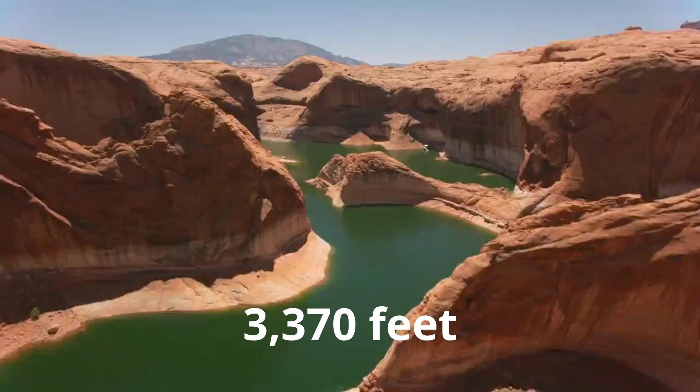3,370 feet. That is the exact elevation where Glen Canyon Dam simply stops working, not runs dry. Stops working. Below that line, called dead pool, water sits trapped because the outlet works can no longer release it by gravity. In April 2023, Lake Powell came within 30 feet of losing hydropower completely, the closest this dam has gotten to that failure since it filled in the 1960s.

Officials called it a drought crisis. I work in reservoir operations, and drought is the smaller part of this story. The real failure was poured into concrete in 1963. And here's a small detail that tells you how messy the record keeping around this dam actually is.

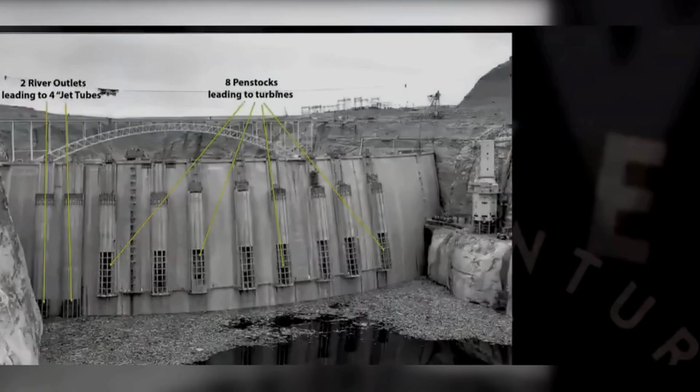The number everyone quotes for dead pool, 3,370 feet, matches the intake elevation of the river outlet works. But the United States Geological Survey ran its own elevation area capacity survey of the reservoir in 2018, and it places the equivalent dead storage bench slightly higher at 3,372.91 feet. That's not a huge gap. It's a couple of feet.

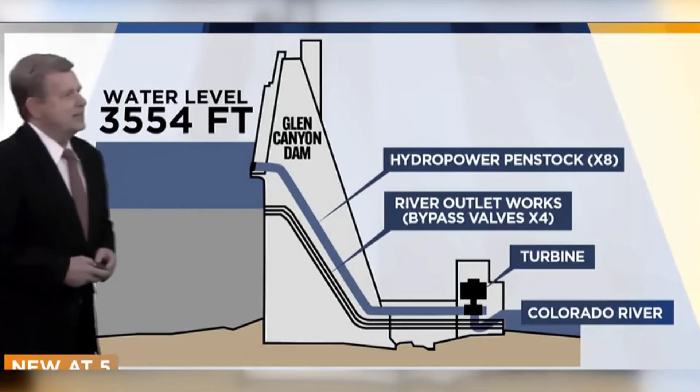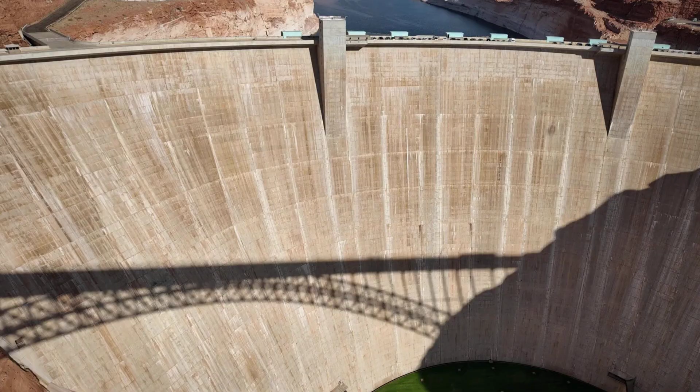But when your entire crisis narrative hangs on a single elevation number, and two federal data sources don't agree on it to the foot, that tells you something about how loosely this system has actually been tracked over the decades. Below either version of that line, the reservoir doesn't vanish. Roughly 2 million acre-feet of water would still sit there, stranded behind the dam, rising and falling only with inflow, evaporation, and seepage, completely unusable for downstream delivery or power. That's not an empty canyon. That's dead weight.

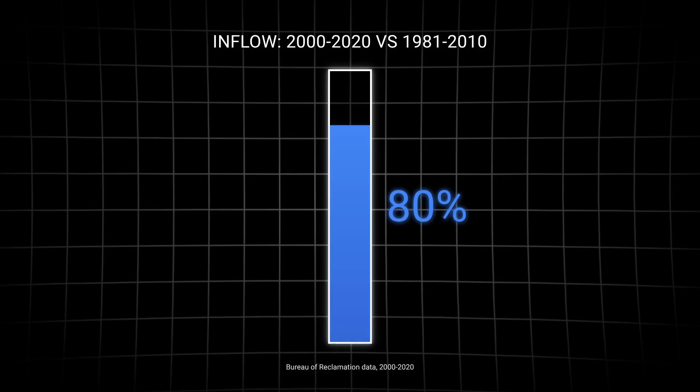Here's what the drought story leaves out. This decline was never a surprise. From 2000 to 2020, unregulated inflow into Lake Powell averaged just 8.62 million acre-feet a year. That's roughly 80% of the 1981 to 2010 average. Reclamation had that number. Basin states had that number. This wasn't a flash flood of bad news. It was a slow, tracked, modeled decline that showed up in federal reports for 2 decades before anyone treated it like an emergency.

So when officials stand up and call this a drought crisis, I don't disagree. I just think crisis implies surprise, and this was never a surprise. This was a spreadsheet. Okay, so if it wasn't sudden, why does it feel sudden now? Because the dam has a design ceiling, and in April 2023, the reservoir finally scraped up against it.

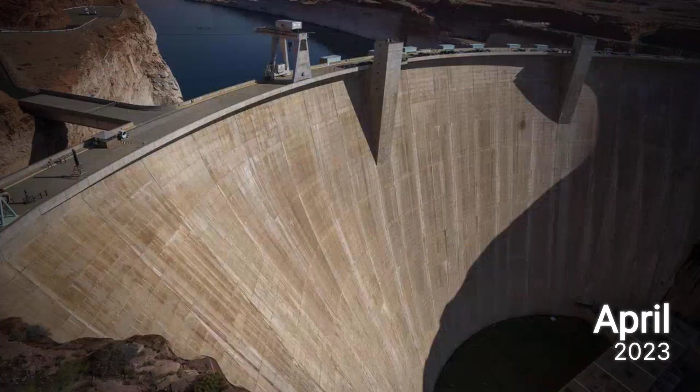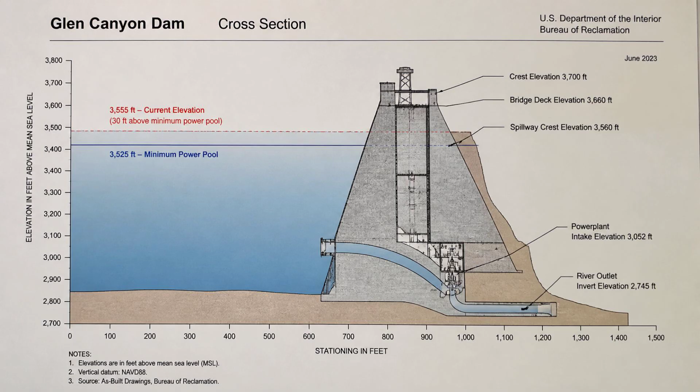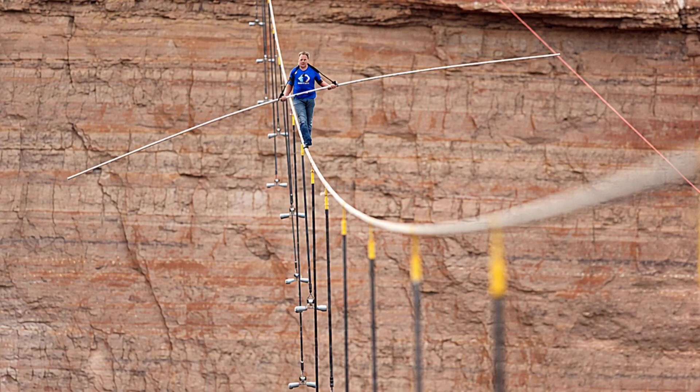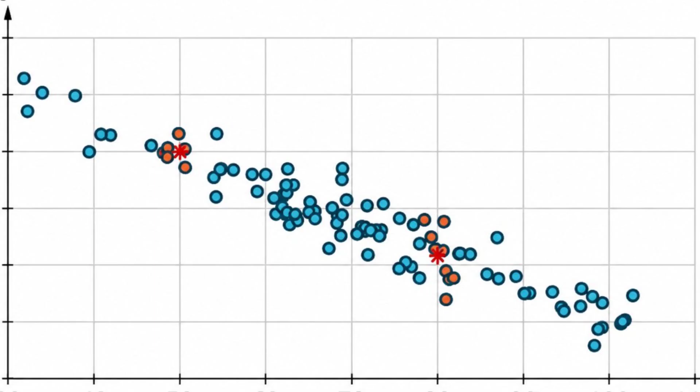Let's put a number on what that 30-foot margin actually costs, because cushion is doing a lot of vague work in that sentence. Reclamation has stated that every additional foot of decline at Lake Powell cost the dam about 3 megawatts of generating capacity. Not eventually, immediately. And this isn't a new squeeze.

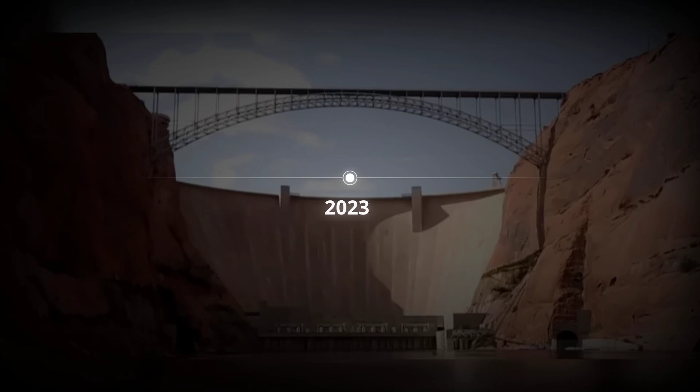In the decade before the current drought began in 2000, this power plant averaged around 4,600 gigawatt hours of generation a year. By early 2023, capacity had already fallen to roughly 59% of the dam's rated nameplate output, about 778 megawatts. Some of that is the water level. Some of it is the 1992 Grand Canyon Protection Act, which restricts how hard operators can run the turbines to protect downstream ecology, cutting off the option to just squeeze more peaking power out of what's left.

So you've got less water, a shrinking head of pressure behind the turbines, and legal restrictions on running them harder to compensate. 3 separate constraints, all tightening at the same time, and all 3 predate this week's headlines by years. And here's the detail that should bother you more than the elevation number itself.

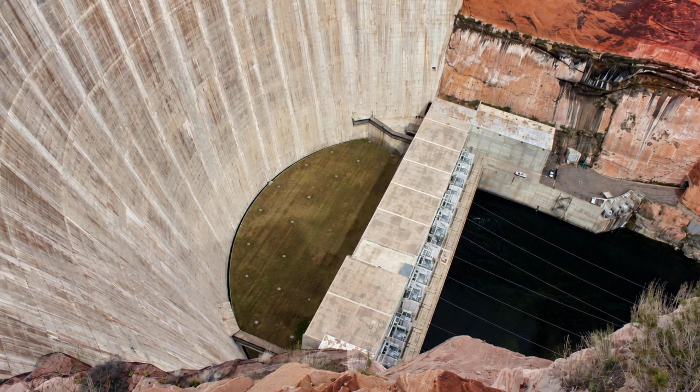That 20-foot gap between the hydropower penstocks and minimum power pool was not set by some unchangeable law of hydraulics. A 2023 Reclamation presentation acknowledged that gap exists largely to prevent vortex formation at the intakes, and that it could potentially be reduced with vortex suppressing structures.

Read that again. The buffer that is shutting down hydropower years earlier than it strictly has to may be a modifiable engineering choice, not an unchangeable physical law. Nobody has built that retrofit. As of this recording, it is a line in a slide deck, not a structure in the dam.

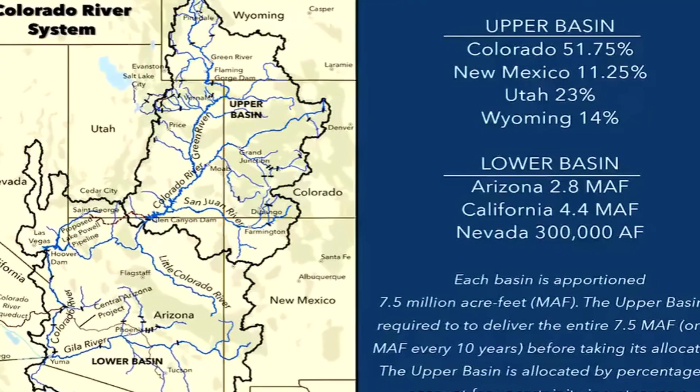Now let us back up to why this dam was ever allowed to be built this thin on margin in the first place, because that goes back further than 1963. The legal entitlements every basin state draws from the Colorado River trace back to the 1922 Colorado River Compact, which divided up the river's water based on flow measurements taken during an unusually wet handful of years.

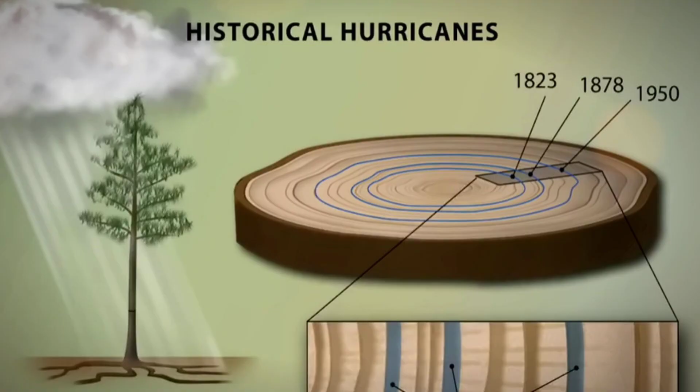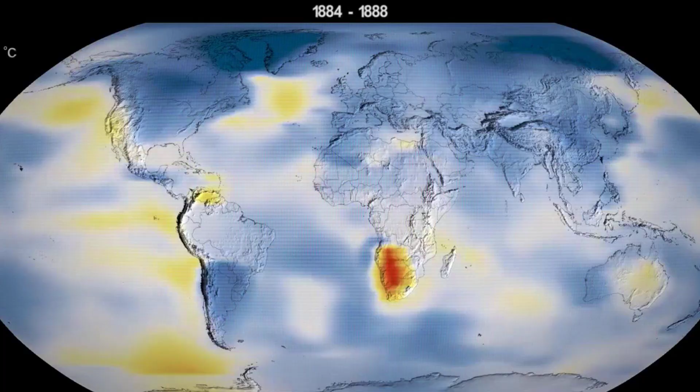Later hydrology work has made it clear those early measurements overestimated how much water the river actually delivers in a typical year, which means the entire allocation system downstream of that compact was built on optimistic paper math from the start. Tree ring reconstructions published in Nature Climate Change found that the period from 2000 to 2021 was the driest 22-year stretch in the American Southwest in roughly 1,200 years, and that human-caused warming made the shortfall meaningfully worse.

So you have got a dam engineered around 1922's optimistic paper water operating through the driest generation in over a millennium. That is not one design flaw. That is a design built on top of an accounting error, aging through a climate nobody in 1922 or 1963 planned for. I'll be fair here, because I don't want to make this sound like nobody saw this coming.

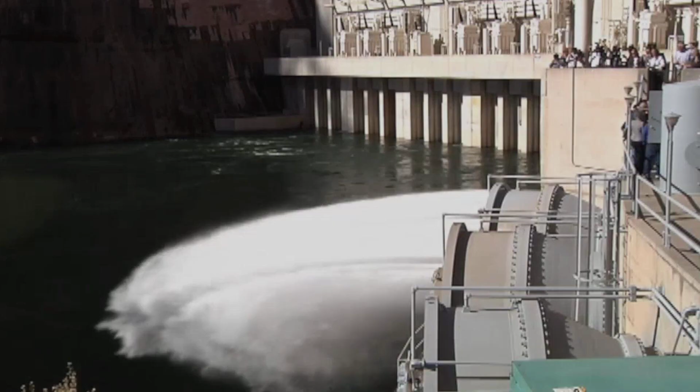People saw it coming. In August 2022, Zach Frankel at the Utah Rivers Council was already telling anyone who'd listen that Glen Canyon Dam physically cannot meet downstream water demand once levels drop below the hydropower penstocks.

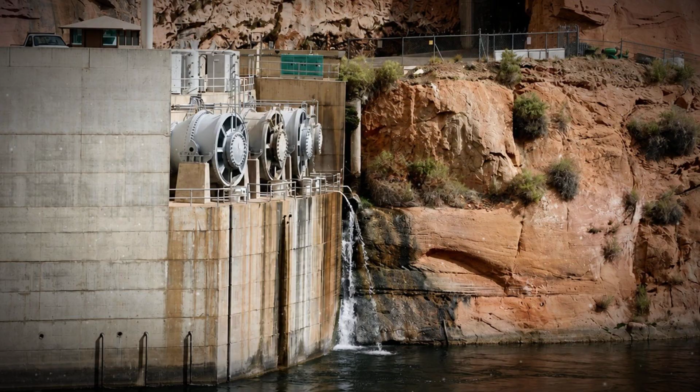That same year, 3 environmental groups, the Great Basin Water Network, the Glen Canyon Institute, and the Utah Rivers Council, published a joint report bluntly titled "Glen Canyon Dam's Aging Plumbing and Postponed Leadership." The whole argument of that report was that the river outlet works, the backup system below the turbines, were never built to handle sustained, low-level releases.

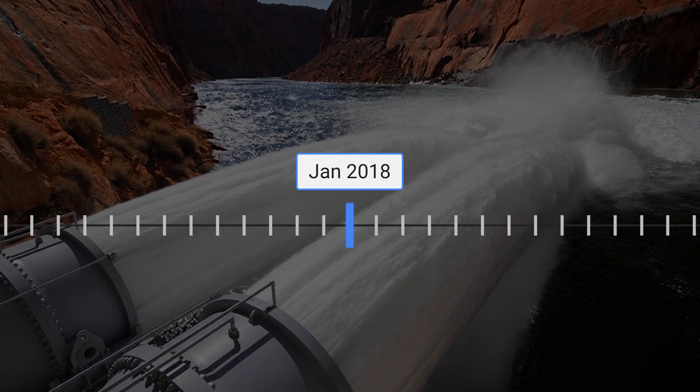It's worth knowing this wasn't the first time Reclamation tried this maneuver either. High-flow experiments had already been run in November 2012, 2013, 2014, 2016, and 2018, all timed for the fall, all using the same basic logic of flushing sediment down through the Grand Canyon to rebuild beaches. The April 2023 release was the first time the agency ever attempted one of these in spring instead of fall, and the first time one was run with the reservoir sitting this close to minimum power pool.

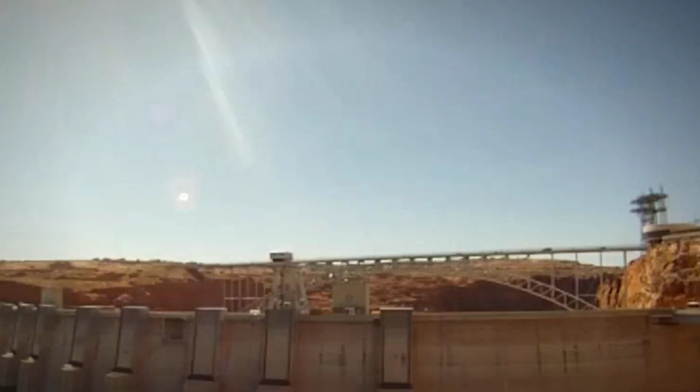So this wasn't an untested tool suddenly deployed in a crisis. It was a well-established tool used 5 times without this kind of structural damage, then run a 6th time under conditions nobody had tested it against, and it broke. So when the crisis hit in spring 2023, it wasn't a new discovery. It was an old warning finally colliding with reality. That's not drought. That's a monitoring gap between what engineers knew and what got funded.

Now here's where the story gets uncomfortable, because the fix that was supposed to protect the ecosystem is the same fix that damaged the dam. In late April 2023, Reclamation ran what's called a high-flow experiment, sending releases as high as 39,500 cubic feet per second through the dam over about 3 days. The goal was legitimate. It moves sediment down through the Grand Canyon, rebuilds eroding beaches, and supports the habitat native fish depend on.

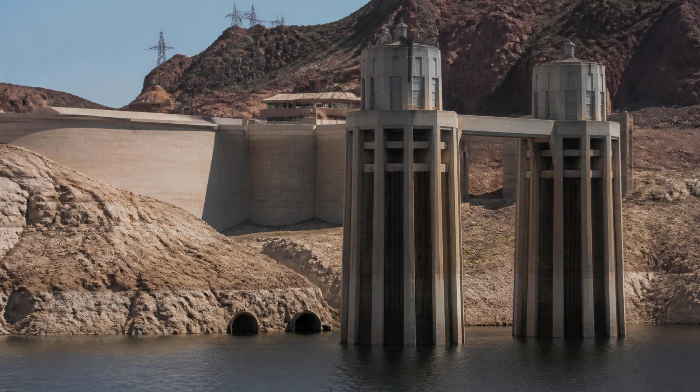During that release, roughly 3,500 cubic feet per second moved specifically through the river outlet works, the low backup pipes near the base of the dam, for about 72 hours straight. Here's why that detail matters, and it's not trivia. Those outlet pipes sit lower in the reservoir, closer to where water levels were already thin. When you push high-velocity water through pipes at low reservoir elevation, you create the physical conditions for cavitation. That's not a guess. That's basic fluid mechanics.

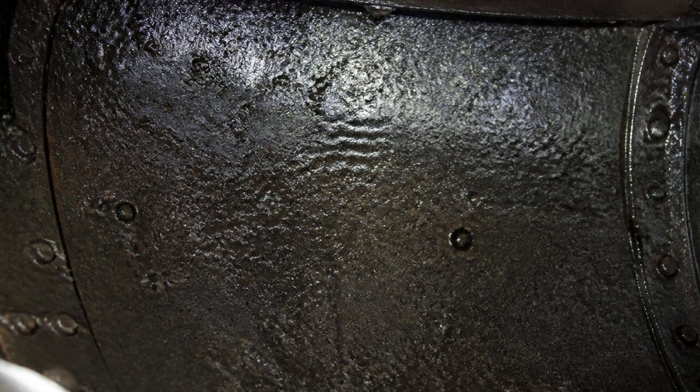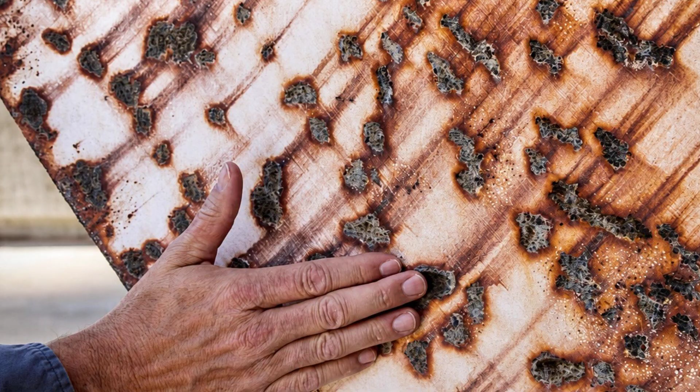Cavitation happens when fast-moving water creates air bubbles near the pipe surface, and those bubbles collapse violently enough to generate shock waves that pit and erode steel from the inside. David Wegner, a former Reclamation engineer who spent 20 years working on Glen Canyon issues, has been blunt about it. Those shock waves are powerful enough to damage steel outright, and that's exactly what an inspection found after the 2023 release. Erosion, pitting, damage inside the 4 outlet pipes.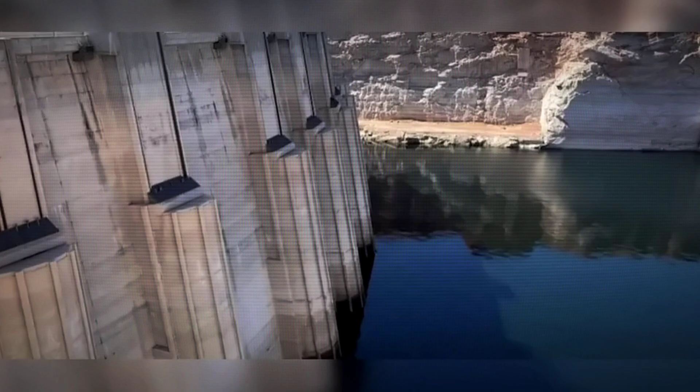A Reclamation official, Nick Williams, said publicly that this wasn't caused by one single event, that it built up over time and becomes more likely specifically when reservoir levels are low, which is the part I want you to sit with for a second. The mechanism that damages this dam gets worse exactly when the dam needs its backup system the most. Low water doesn't just threaten hydropower, it actively erodes the emergency plumbing meant to compensate for low water.

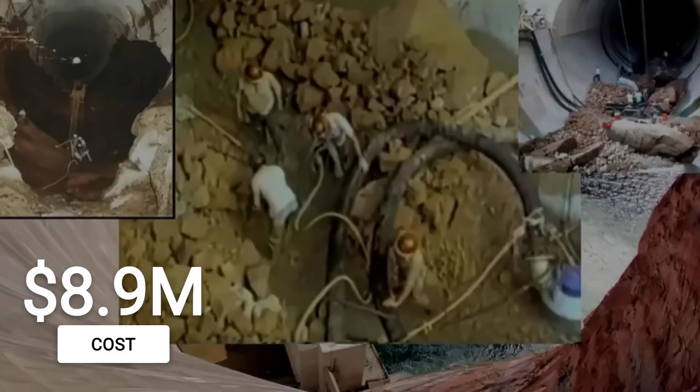So what did Reclamation do about it? They relined the pipes. A year-long, $8.9 million project stripped out coal tar coating that had been sitting inside those outlet works for more than 60 years and replaced it with an epoxy primer and a polysiloxane top coat. And to be fair, that project reportedly finished early and under budget. Good project management. I'm not knocking the contractors.

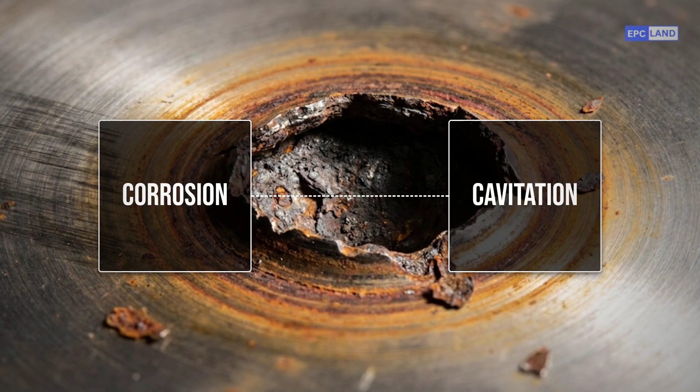But listen to how Reclamation itself described what that project actually fixes. They stated plainly that relining will not prevent the risk of additional cavitation when operating at low reservoir levels. Read that sentence slowly. The multi-million-dollar fix everybody read about in headlines does not solve the problem that caused the damage in the first place. It solves corrosion. It doesn't solve cavitation. Those are two completely different failure modes, and only one of them got addressed.

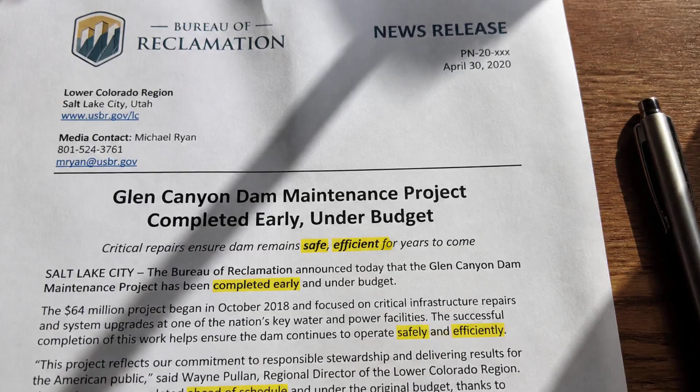Wayne Pullan, Reclamation's Upper Colorado Basin Regional Director, framed the relining work as fulfilling the agency's duty to operate the dam safely and maintain reliable water deliveries. That's a very diplomatic way to describe repainting a pipe without fixing the reason the pipe got damaged. I don't think that's dishonest. I think it's the kind of sentence that sounds reassuring in a press release and sounds like an admission once you understand what cavitation actually is.

Now here's a twist that goes beyond plumbing, because the same low water conditions that are eroding the outlet pipes are also messing with the ecosystem those releases are supposed to protect. When Lake Powell drops, the water Reclamation releases through the dam gets pulled from a shallower, warmer layer of the reservoir instead of the cold water deep underneath. Warmer water passing downstream has helped invasive smallmouth bass establish populations below the dam. That matters because smallmouth bass eat native fish, including the threatened humpback chub and the endangered razorback sucker.

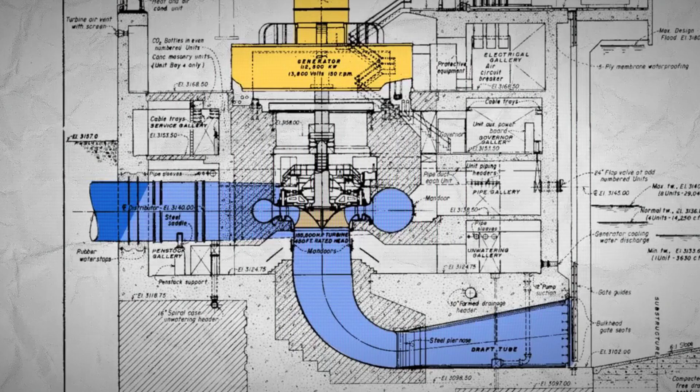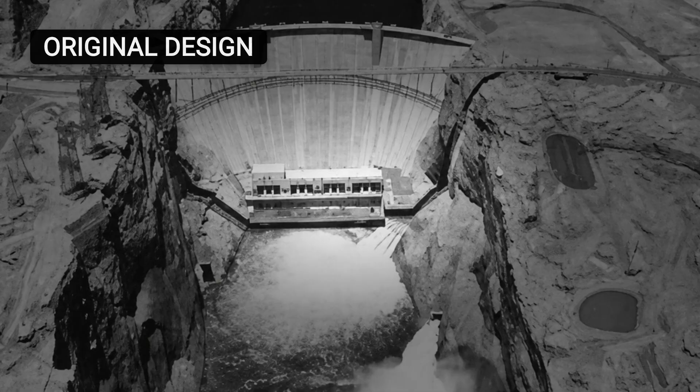So Reclamation now runs what they call cool mix flows, deliberately routing colder water from deeper in the reservoir once average river temperatures near the dam hit about 60 degrees Fahrenheit for 3 straight days. That's a second improvised system stacked on top of the first improvised system, both trying to compensate for a dam that was never designed to operate this way at this elevation.

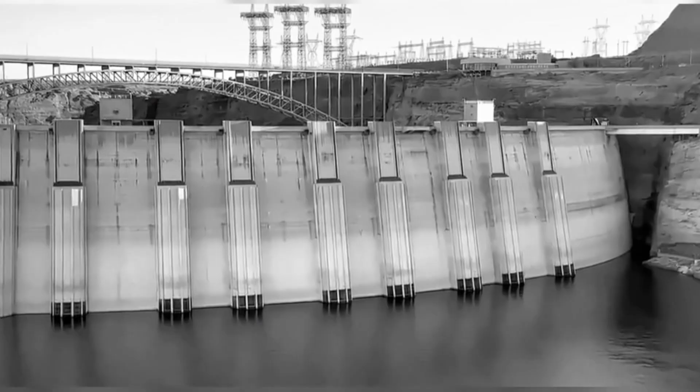This is where I'd usually expect the story to wrap up neatly. It doesn't, because the tool that's supposed to fix everything, the high flow experiment, might not even be usable anymore when it's needed. A March 2024 internal memo from Reclamation stated there wasn't sufficient sediment built up to justify running another high flow experiment in spring 2024. Sediment has to accumulate in Marble Canyon before that flushing release is worth doing. So the tool that rebuilds beaches and disrupts invasive fish habitat is currently sidelined, partly because using it damaged the very pipes it depends on, and partly because there isn't enough material downstream to justify running it again yet.

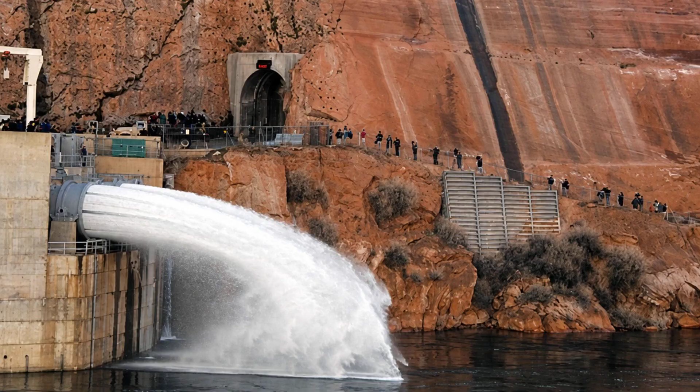And that same memo, authored by Richard LaFond, director of Reclamation's Technical Service Center, said something that I think is the real thesis buried in a government document. He wrote that nothing in Glen Canyon Dam's design references indicates the river outlet works were ever intended for long-term water conveyance at low reservoir levels. Let that sink in. The emergency backup pipes people are now depending on to keep water and power flowing were never designed to be a primary system. They were designed as a relief valve, not a lifeline. And right now, they're being asked to be a lifeline. That's not a conspiracy. That's an engineering memo quietly admitting the dam's backup plan was never meant to be the plan.

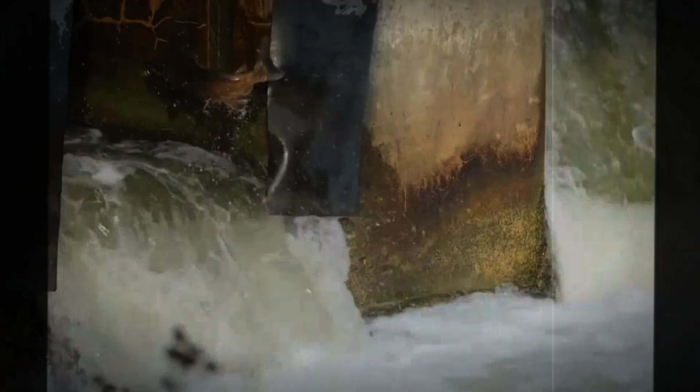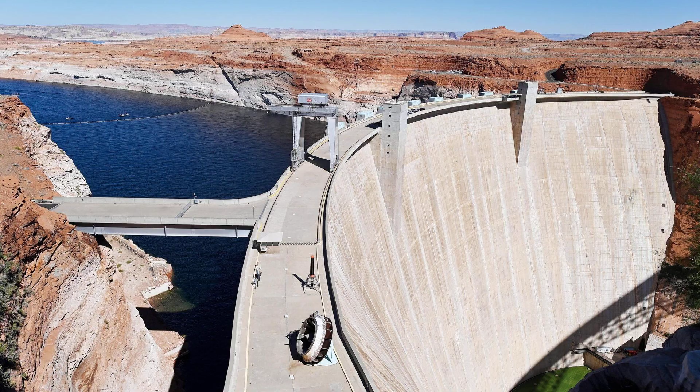I want to be fair about the technology itself, because I don't think the outlet works are fake or useless. They're legitimate infrastructure doing a job they weren't built for. This is the same pattern I see across a lot of badly aging water and dam systems. A component that works fine under normal design conditions gets pushed into duty under conditions nobody planned for, and then people act shocked when it starts failing. The outlet works aren't broken by incompetence. They're broken by mismatch. Depth mismatch, specifically. And no amount of epoxy changes that mismatch.

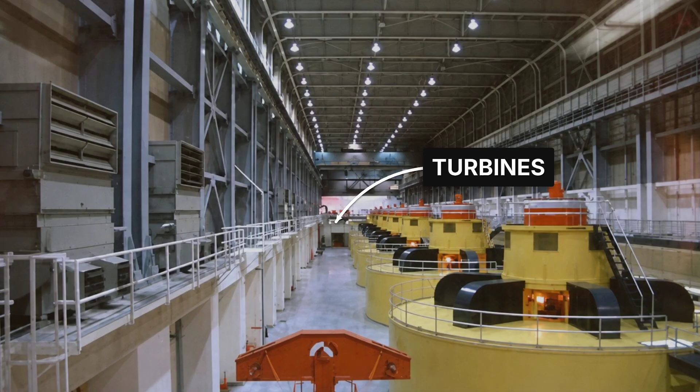So where does that leave the actual fix? The one that would solve the elevation problem instead of patching around it? Reclamation has floated 3 real engineering options. One is a new, lower intake tied into the existing turbines, which would let the dam pull water from what's currently dead pool territory.

Reclamation's own materials note that option carries increased risk, specifically because it means penetrating through the dam structure itself, which is not a small thing to attempt on a 710-foot concrete dam holding back millions of acre-feet of water.

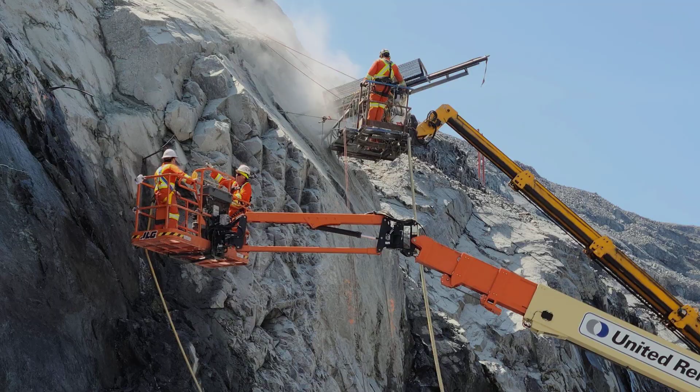The second option connects new power generation equipment directly to the river outlet works. The third is the most dramatic, tunneling through the canyon wall to build an entirely new underground power station, which would also give operators more flexibility on releases generally.

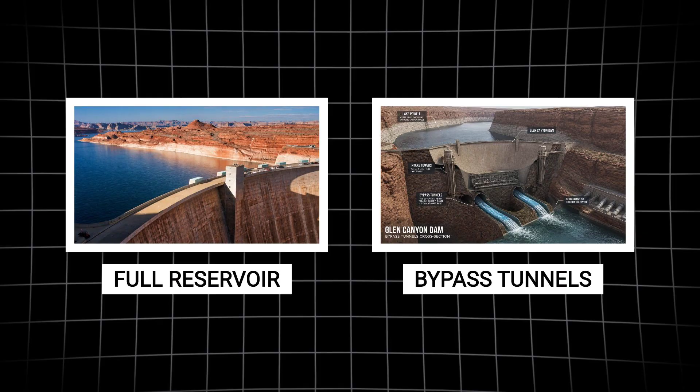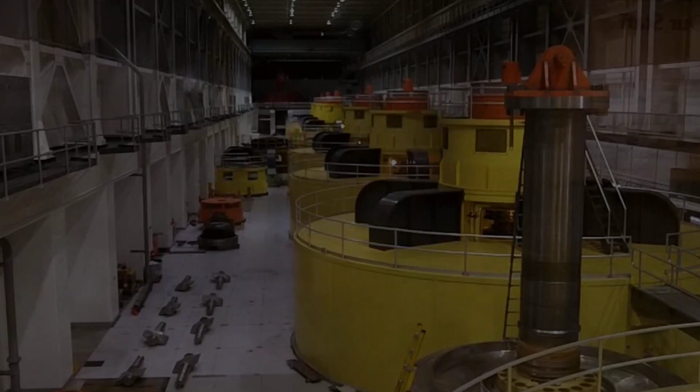There's a fourth option on the table too, and it's the one that tells you how seriously people inside this field are taking the mismatch. Some scientists, including Zana Stutz at the Glen Canyon Institute, have proposed something more radical than any retrofit: draining Lake Powell entirely and routing the river through bypass tunnels drilled around the base of the dam, letting the Colorado run essentially free through what is now a reservoir, while keeping the dam itself in place purely as emergency storage. That would end hydropower generation at this site permanently.

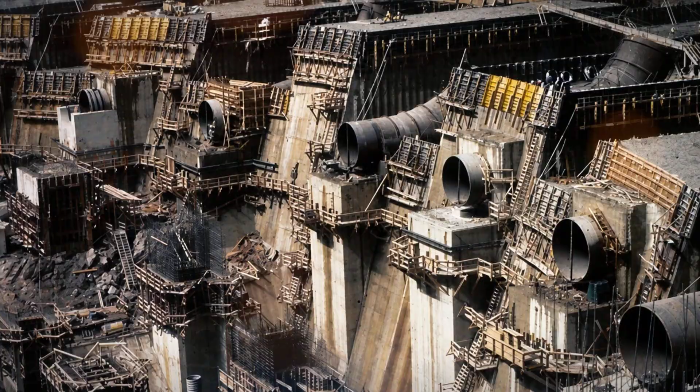Nobody is pretending that's a small ask, but the fact that a full drawdown is even being discussed in serious policy circles instead of being laughed out of the room tells you how far outside its original operating envelope this dam has already drifted. When abandoning the core function of the facility becomes a legitimate item on the table, that's not really a debate about engineering options anymore. That's a debate about whether the original premise still holds.

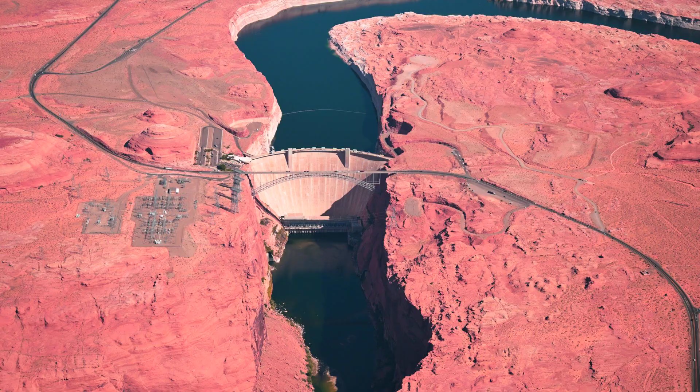None of these have been built. None of them are funded to completion as of this recording. They exist as engineering options in a slide deck and a technical memo, the same place that vortex suppression idea has been sitting. This is the part that bothers me professionally, because none of these options are secret and none of them are moving at the speed the reservoir is dropping.

Zana Stutz, program director at the Glen Canyon Institute, has framed the core problem about as bluntly as I've heard anyone in this space put it. She's argued the dam has effectively become a bottleneck, physically sitting on top of roughly 6 million acre-feet of water that the current outlet structure simply cannot reach. That's not a hypothetical volume. That's real water, sitting behind a wall that was built without a true low-level release path in the first place, and this doesn't stay contained to the reservoir.

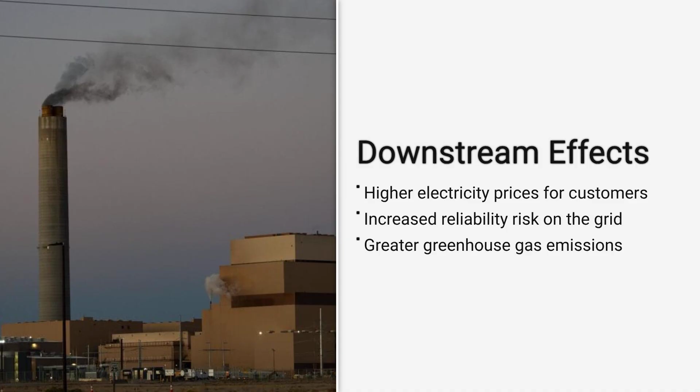When federal hydropower generation at this dam drops, its preference customers, mostly publicly owned utilities and rural electric cooperatives that buy power at cost through the Western Area Power Administration, have to replace that supply somewhere else, usually at higher cost. Reclamation and outside analysts have flagged the downstream effects as higher electricity prices for those customers, increased reliability risk on the regional grid, and higher greenhouse gas emissions as utilities lean on other generation sources to cover the gap.

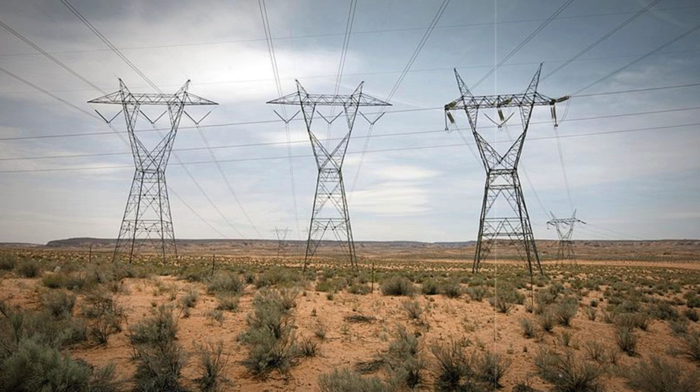The dam's overall share of the regional grid is small enough that these effects don't reshape the entire Western power market by themselves. But for the specific communities plugged into this specific power contract, a foot of reservoir decline isn't an abstraction. It's a line item on somebody's utility bill.

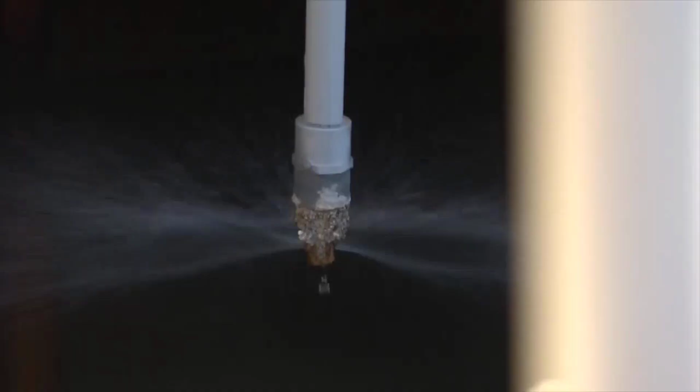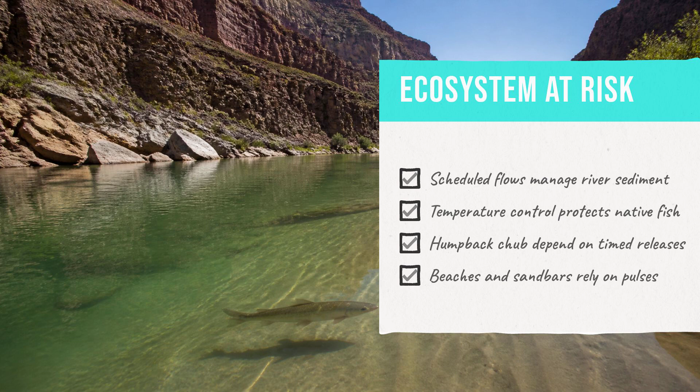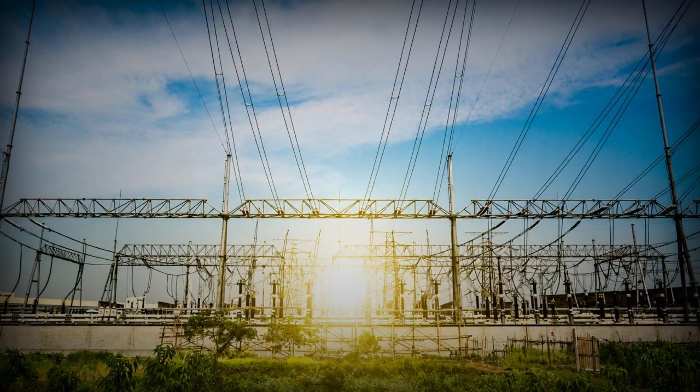And here's where the human stakes stop being abstract. This dam's operation touches roughly 25 million people downstream who depend on Colorado River deliveries, plus billions of dollars in agriculture, plus every hydropower customer on the grid that draws from this plant, plus the entire downstream ecosystem in the Grand Canyon that depends on scheduled releases to manage sediment, temperature, and native fish survival. When people talk about Lake Powell like it's a scenic reservoir story, they're missing that this is simultaneously a water supply story, a power grid story, and an endangered species story, all bottlenecked through the same aging concrete structure.

And I want to bring this current because this isn't a story that resolved itself after 2023. As of this recording, Lake Powell is sitting at roughly a quarter full. Water year 2026 has been one of the worst inflow years on record for this reservoir, with unregulated inflow tracking at only about 34% of average. Reclamation's own projections show the lake ending this water year near 3,510.85 feet, which would sit below the 2023 record low.

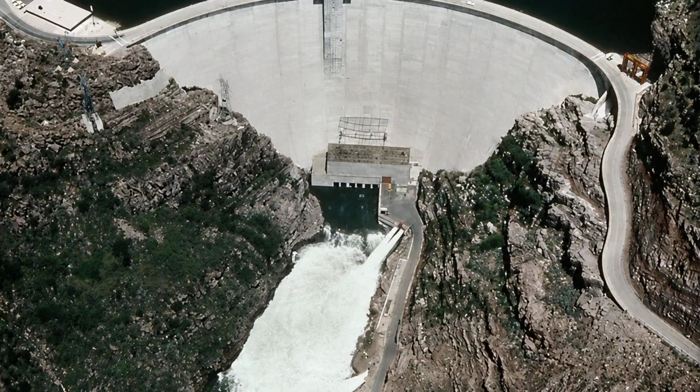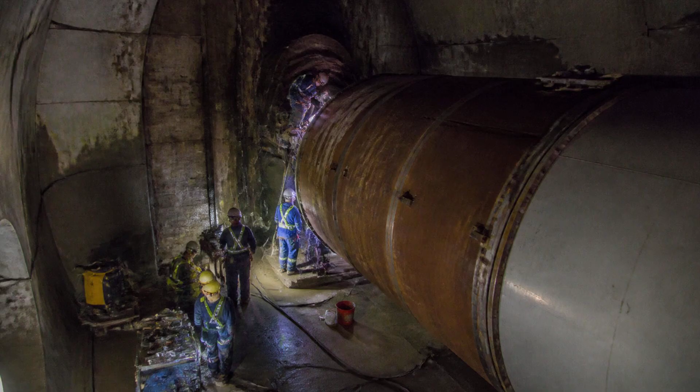To slow that slide, the agency cut its scheduled release to 6.0 million acre-feet, the lowest its current operating rules allow, and it's pulling an additional 660,000 to 1 million acre-feet down from Flaming Gorge Reservoir upstream through April of 2027, essentially borrowing water from one reservoir to prop up another. Every fix I've walked you through so far, the relining, the cool mix flows, the interim cavitation guidance, is still in place right now, in 2026, while the lake threatens to set a new record low anyway.

That's the clearest evidence I can give you that none of this has actually solved the underlying mismatch. It's bought time. Time is not the same thing as a fix.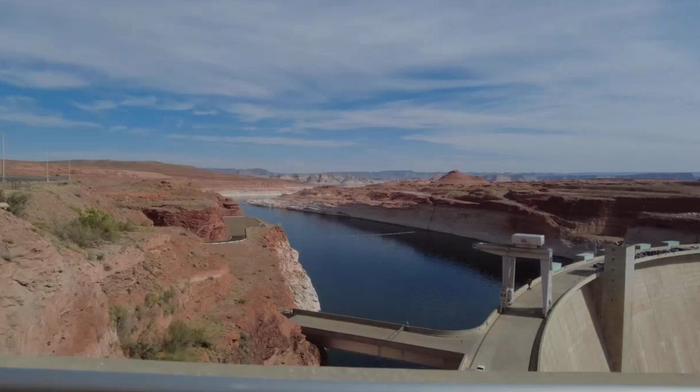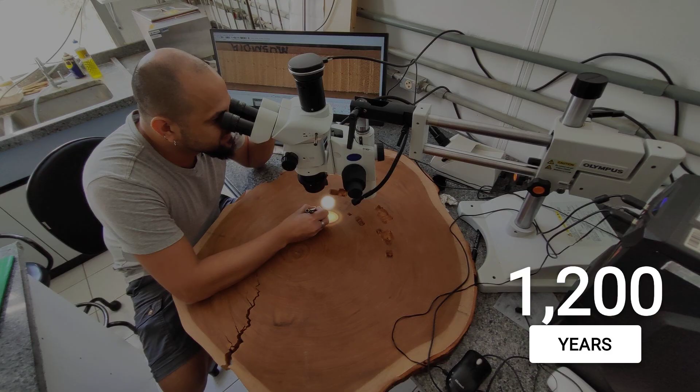I keep coming back to one detail because I think it's the cleanest explanation for why every proposed solution keeps under-delivering. Glen Canyon Dam was designed and built in the early 1960s, in an era of assumed abundance. Engineers weren't planning around scarcity. They weren't planning around a 22-year drought that tree ring records now show is the driest stretch the region has seen in roughly 1,200 years.

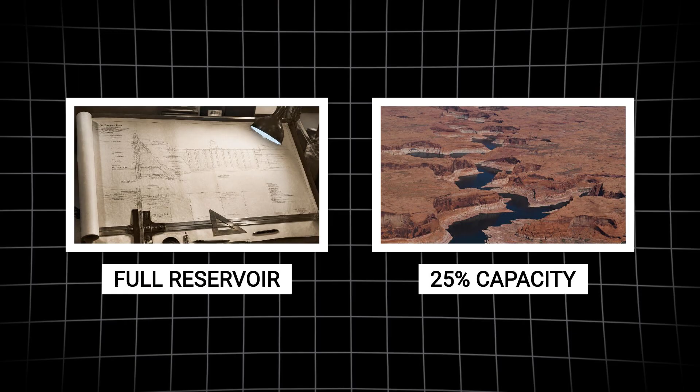They built a structure that stores water beautifully and releases water only down to a certain point because nobody seriously modeled a future where the reservoir would sit at a quarter full for years at a stretch. That assumption is baked into the concrete. You cannot engineer your way around a design ceiling with a maintenance contract. You can only engineer your way around it by changing the structure itself, and that hasn't happened yet.

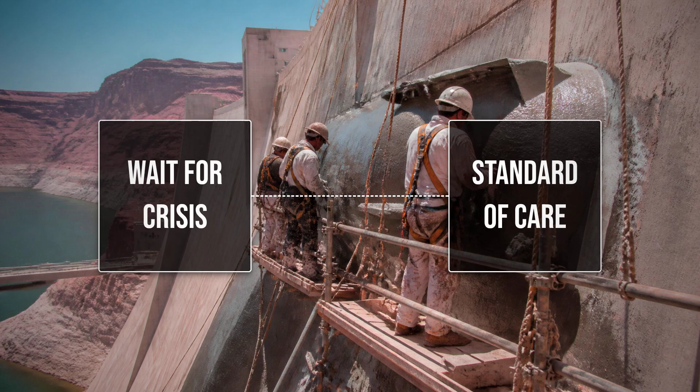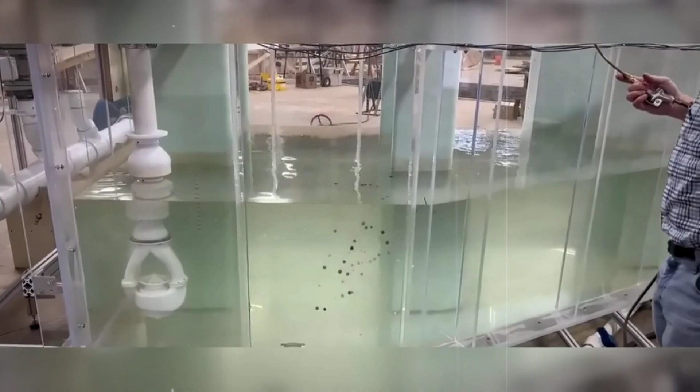Which brings me to what a properly managed system would have looked like instead. If I were advising on this, standard of care wouldn't be wait for the crisis and then coat the pipes. Standard of care means building the low-level intake before you're 30 feet from losing power generation, not after. It means treating vortex suppression and cavitation risk as design problems to be solved in advance, not operational surprises to react to after an inspection finds pitting in steel.

It means funding the retrofit at the same urgency level as the press release announcing the temporary fix. Right now, what we have is politics and public messaging moving at press release speed, while the actual engineering moves at grant cycle speed. Those two speeds do not match the speed of a reservoir falling toward minimum power pool.

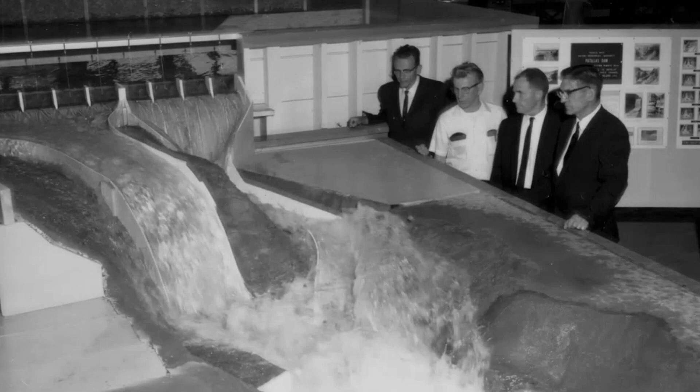I also want to flag what we genuinely don't know yet, because I think the honesty matters more than the outrage. We don't have a confirmed public timeline for when, or if, any of those three retrofit options gets fully funded and built. We don't know exactly how much additional cavitation risk accumulates with each future low-level release, because Reclamation itself is still testing that using small-scale physical models at its Technical Service Center in Denver.

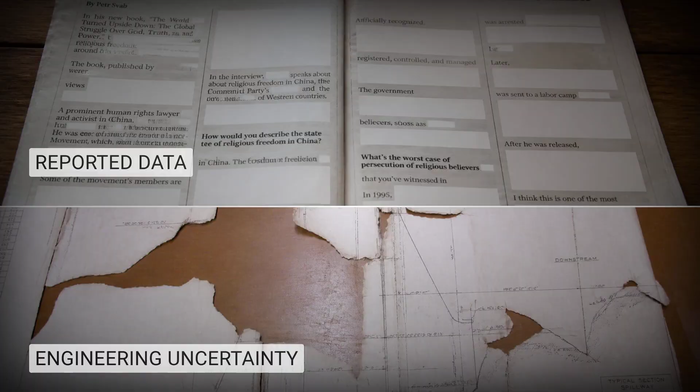That's not me being coy. That's the actual state of the evidence right now. The uncertainty here isn't a gap in reporting, it's a gap in the engineering answer itself, and that gap is what should worry you more than a scary headline number.

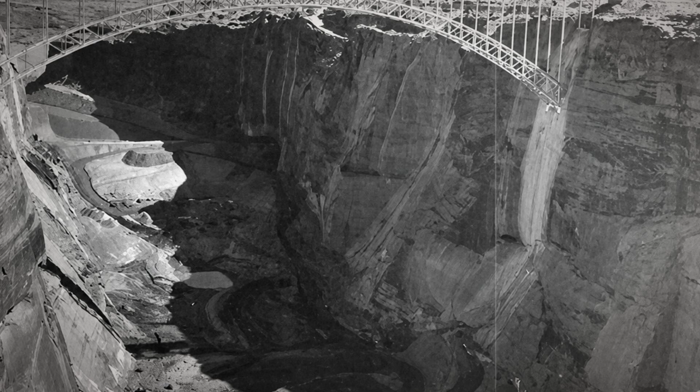Because here's the theme underneath everything I've walked you through. This was never really a story about drought outrunning a reservoir. It's a story about a structure that had a known design limitation, documented warnings two decades old, a temporary maintenance fix that explicitly does not address the underlying failure mode, and an emergency ecological tool that damaged its own delivery system the one time conditions forced it to run at the edge.

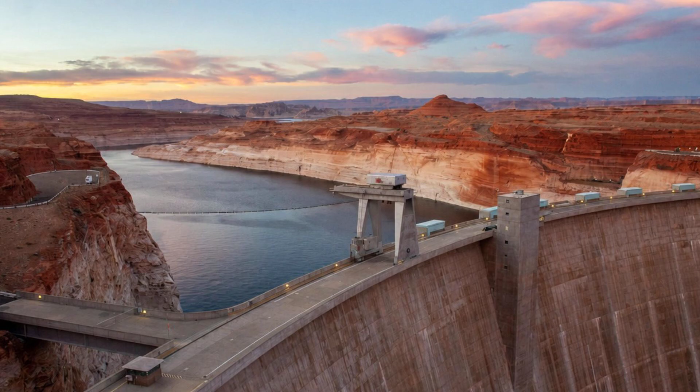Every one of those pieces was knowable in advance. None of them were hidden. They were sitting in agency reports, environmental group publications, and internal Reclamation memos the whole time. I am not shocked this happened. Water systems fail exactly like this, in slow, documented, entirely foreseeable ways, and then everyone acts surprised on the day the number finally crosses the line someone flagged years earlier.

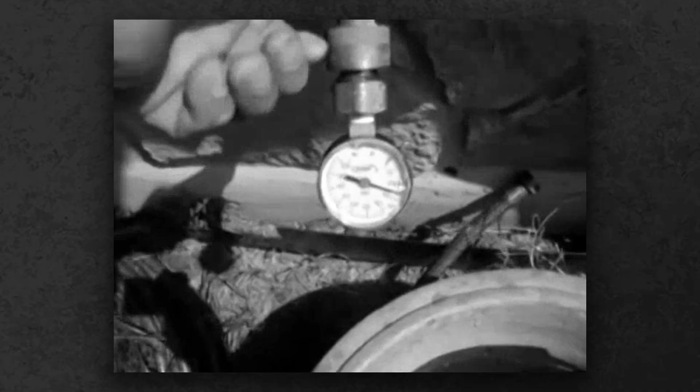What actually shocks me is watching officials describe a repainted pipe as a solution when their own engineers already told them, on paper, that repainting doesn't touch the actual problem. So here's where this really leaves us. Zana Stutz asked the obvious question out loud. Why was this dam built? And is it still doing that job? Her own answer was no.

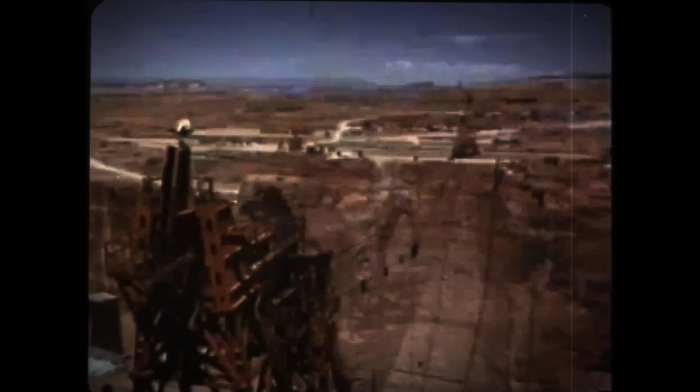I think that's fair. This structure was built to store abundance and generate power off the back of a river that no longer reliably delivers either at the volumes 1960s engineers assumed. Everything since 2000 has been managing around that mismatch instead of correcting it. The outlet pipes are relined now. They're shiny, epoxy-coated, under warranty, and finished ahead of schedule.

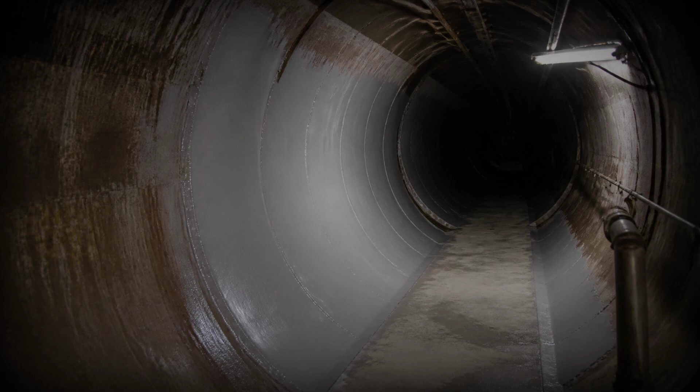Good for the contractors. But the elevation of dead pool hasn't moved a single foot. The design ceiling nobody built past in 1963 is still exactly where it was. The plumbing got repainted, the ceiling is still there, and the next time this reservoir drops toward that line, it won't be a surprise either. It'll just be the same warning, arriving on schedule, to people who already had the memo.